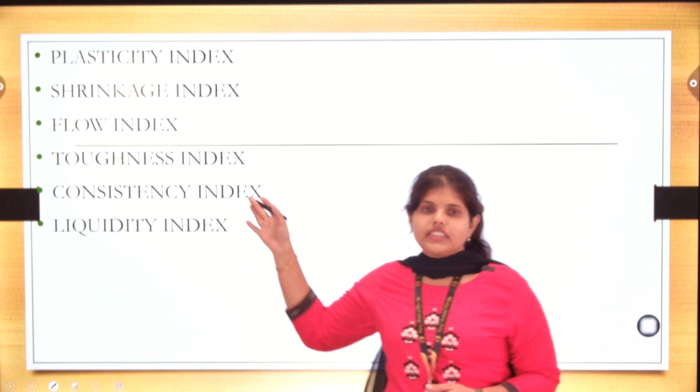Those are plasticity index, shrinkage index, flow index, toughness index, consistency and liquidity index. We will discuss these indices one by one. Let's come to what is plasticity index.

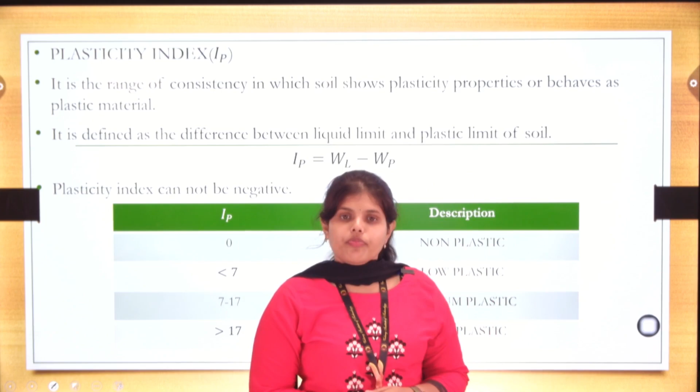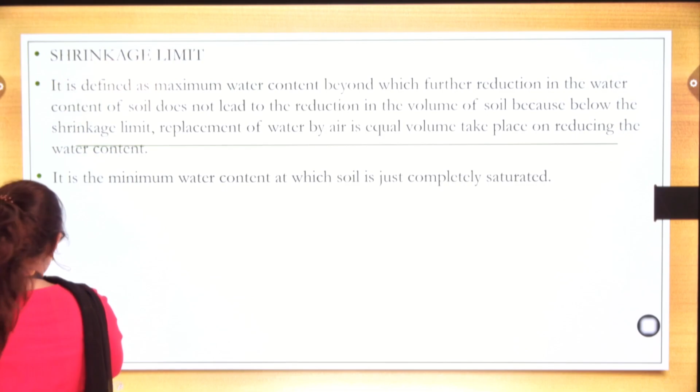Plasticity is nothing but the range of consistency in which soil shows plasticity properties or behavior, as shown in that diagram in our previous diagram that we have already seen. Let's first visit that diagram once. We have already discussed these things in our previous classes.

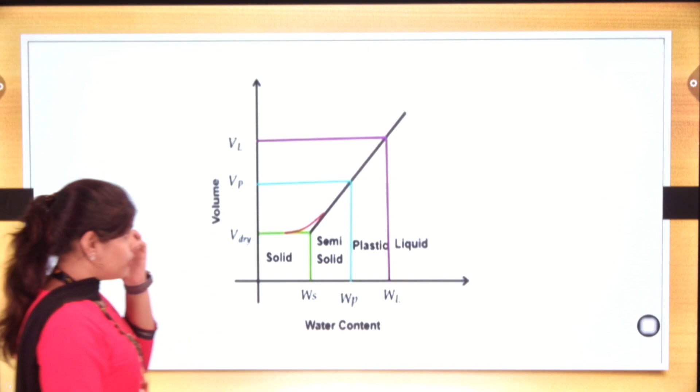So here first go to plasticity index. Plasticity index is nothing but the difference between liquid limit and plastic limit. So we can remember the difference between liquid limit and plastic limit is plasticity index. Likewise, shrinkage index and shrinkage limit, we will discuss that here.

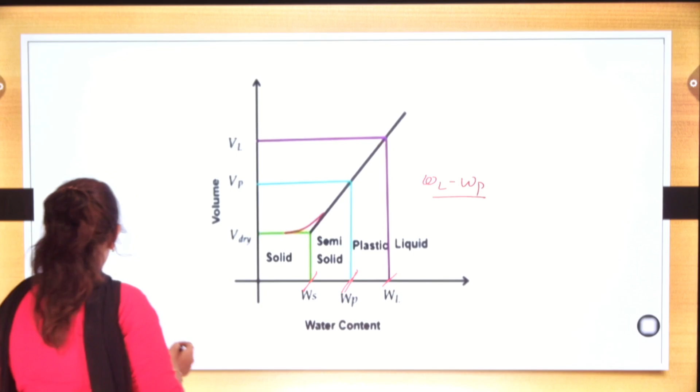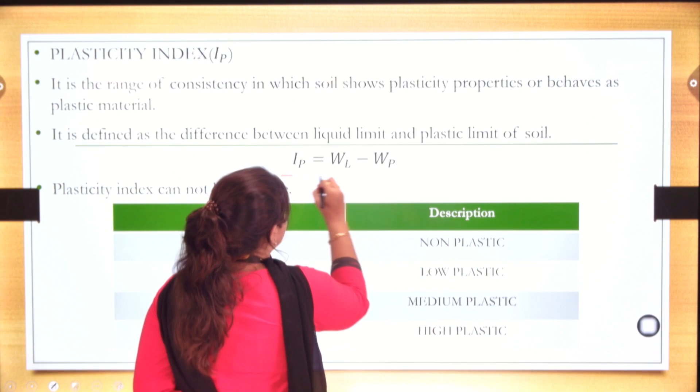So in plasticity index, here, plasticity index is denoted by IP and it is the difference of liquid limit and plastic limit. So plasticity index cannot be negative, right? Why? As the diagram was like that.

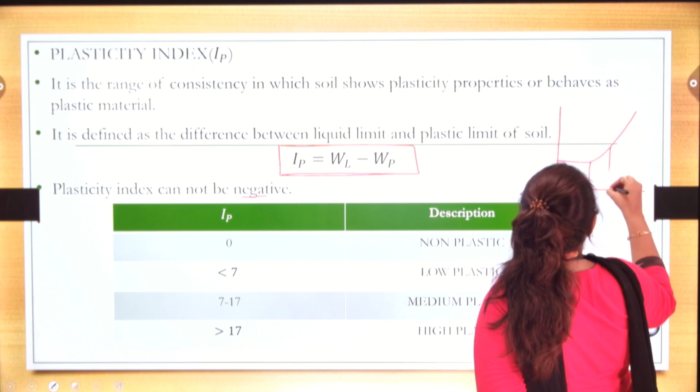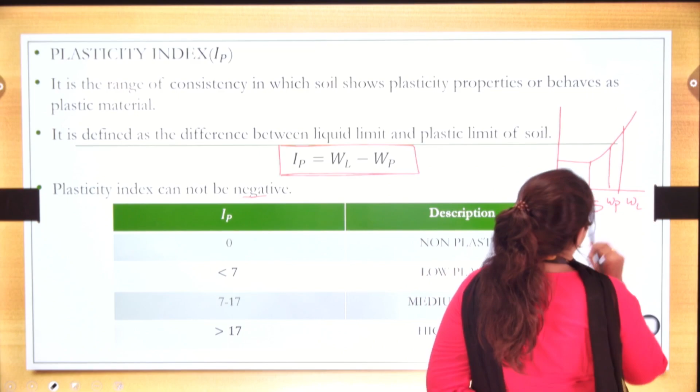So in case of here, we have WL, WP and WS. We have three things: one is our liquid limit, plastic limit and shrinkage limit.

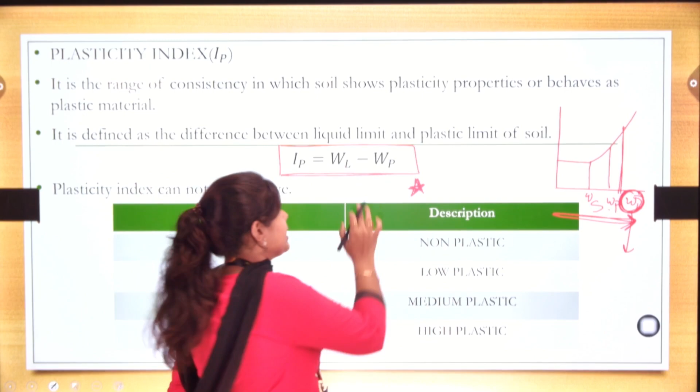As we know, water content is increasing. So while increasing the water content, when the water content is at the upper limit, that will be our liquid limit. So here we can take one point as proof, or highlight that point, that always liquid limit is more than plastic limit.

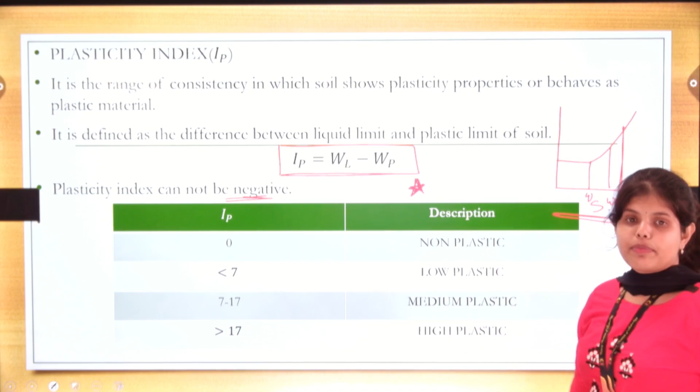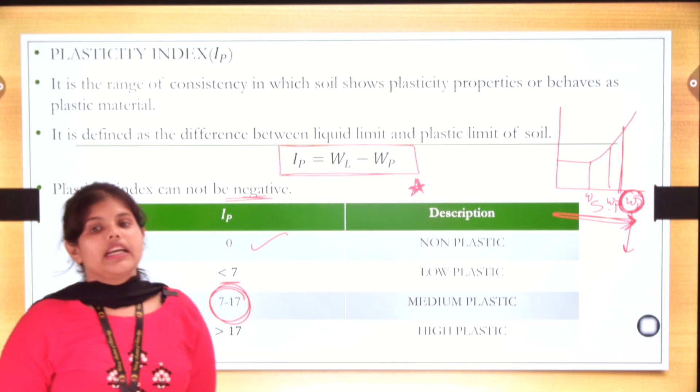So we can say the IP will never be negative, right? So if IP lies at 0, then we can say it is non-plastic in nature. If IP is less than 7, then we term that as low plastic. If the values lie between 7 to 17, then that will be termed as medium plastic, and if more than 17, then that will be termed as high plastic.

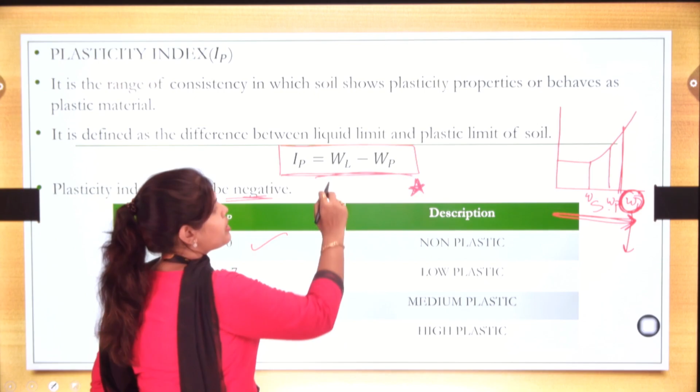So we have understood plasticity index. In plasticity index, there is nothing but it is the difference between liquid limit and plastic limit. So next we come to what is shrinkage index. Shrinkage index is like that also.

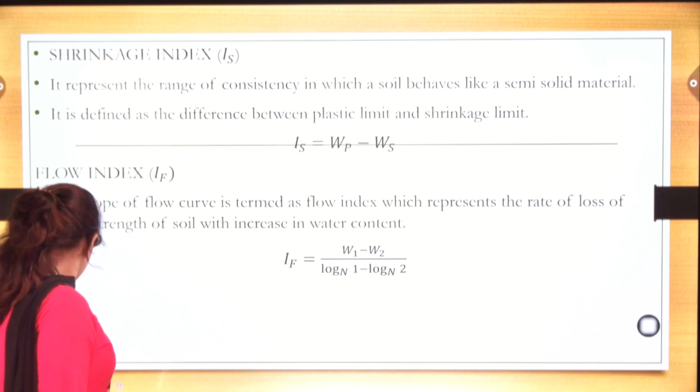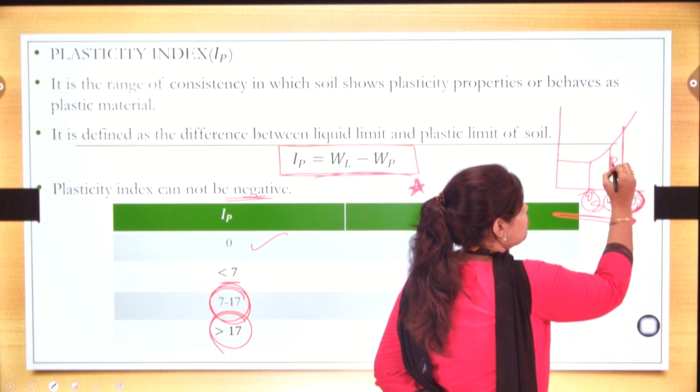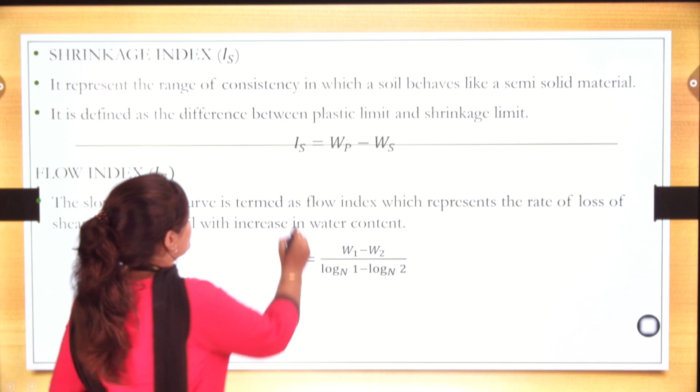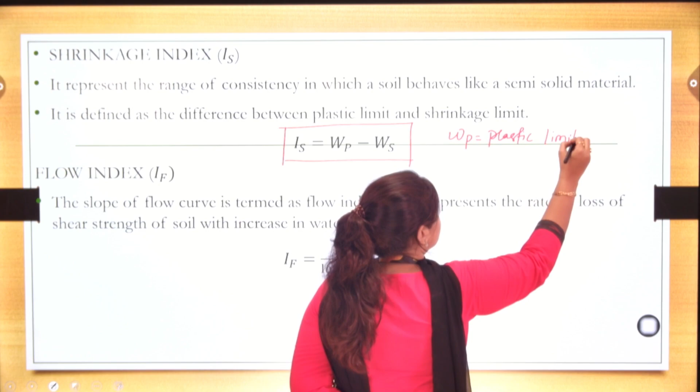In this diagram, first we have WL, WP and WS. So the difference between WL and WP is IP, and the difference between plastic limit and shrinkage limit is nothing but our shrinkage index. We term it as IS equals WP minus WS, where WP is plastic limit and WS is shrinkage limit.

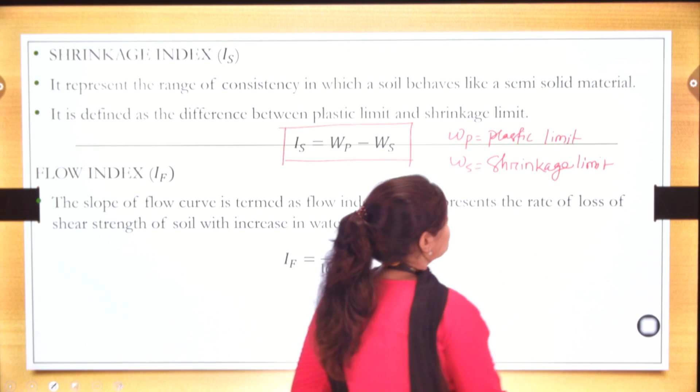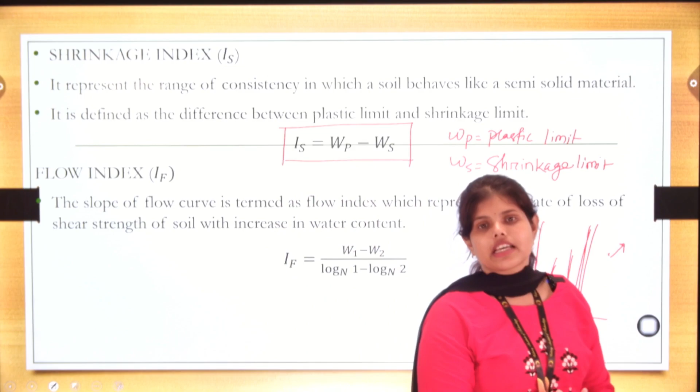So the further definition says that it represents the range of consistency in which soil will behave like a semi-solid material. So first, if water content is higher, soil will behave like liquid or it will start to flow. Then if we lower some water content, the soil will behave like plastic. And if we lower some more amount of moisture content, then soil will behave like semi-solid. So this defines the difference between plastic limit and shrinkage limit, as I have already told. Shrinkage index is denoted by IS, and IS equals WP minus WS.

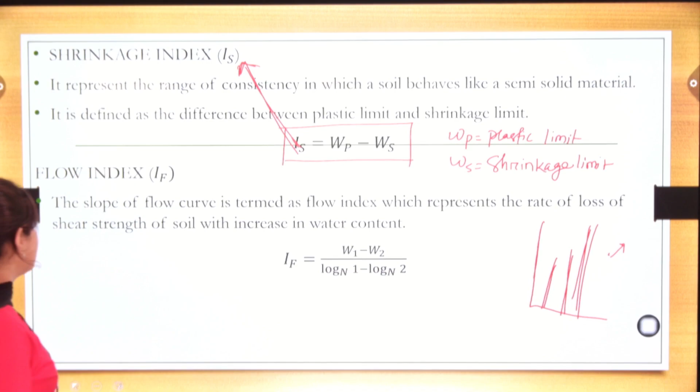Next comes what is flow index. Flow index is the slope of the flow curve, which is termed as flow index.

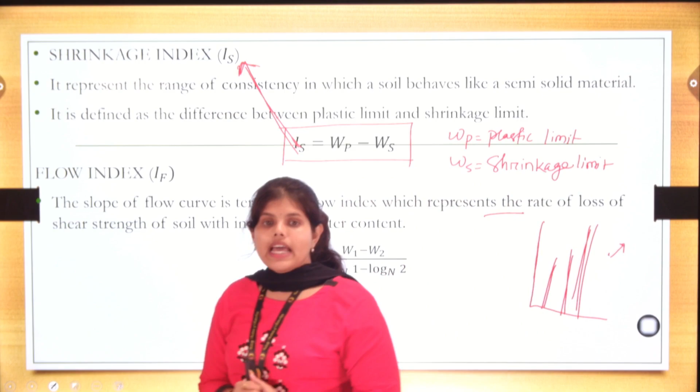Okay, so what does this represent? The rate of loss of shear strength of soil with increase in water content. So the formula for flow index is...

IF is equal to W1 minus W2 over log N1 minus log N2. What are these things? If we draw one flow curve, there will be a number of blows on this axis, and the y-axis shows water content. We will understand later why this curve looks like this and why we take these values. When number of blows increases, there will be a decrease in water content.

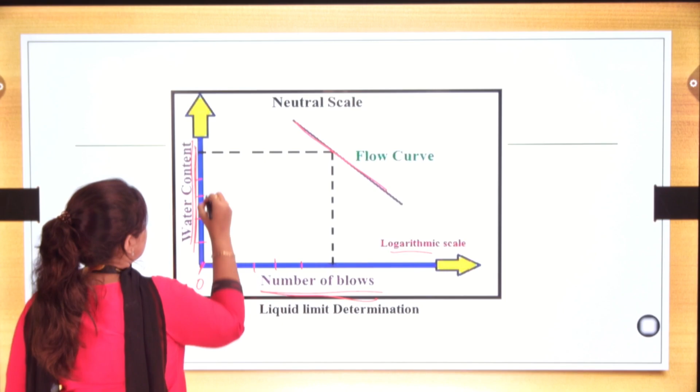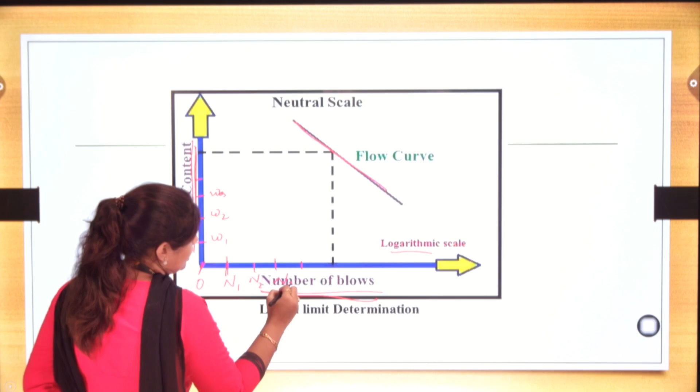We just need to remember the formula, that is IF equals W1 minus W2. What are W1 and W2? Here this is 0, and if we increase water content, we will have W1, W2, W3 like this. And on this scale we will have N1, N2, N3 and so on.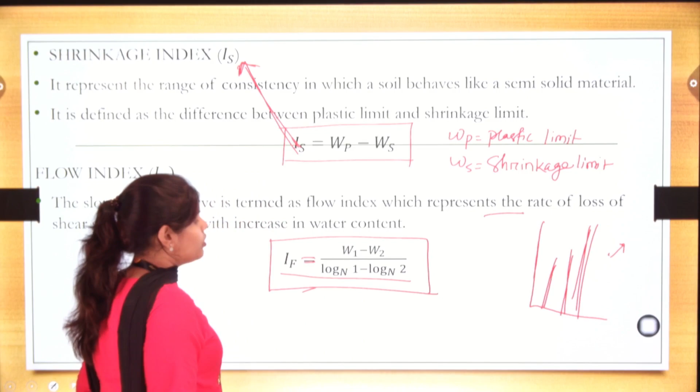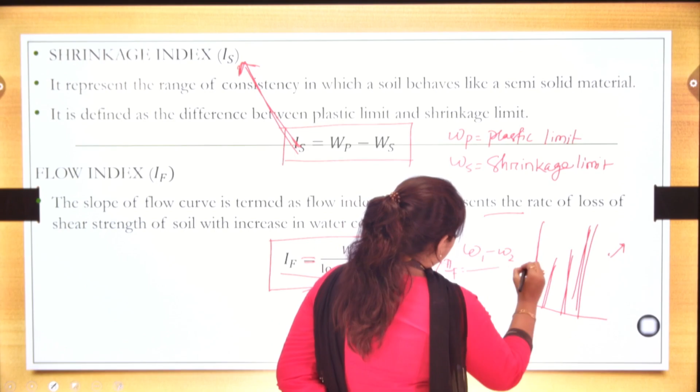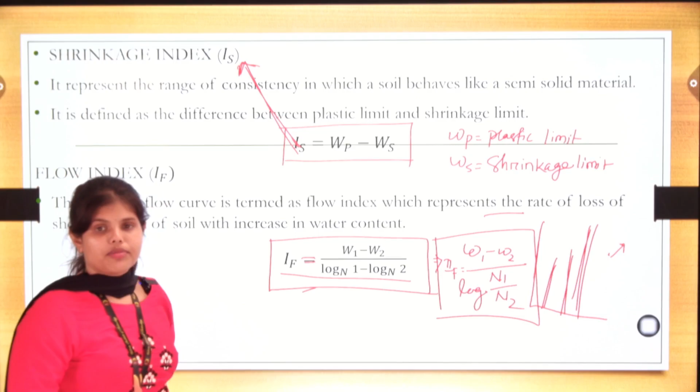So we have the formula, IF equals W1 minus W2 upon log N1 minus log N2. We can also write IF as W1 minus W2 upon log of N1 by N2. So here, for flow index, we have the formula IF equals W1 minus W2 over log N1 by N2.

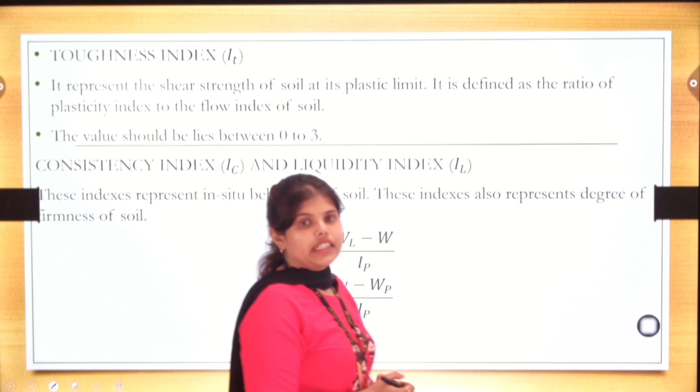Next is toughness index, represented as IT. It represents the shear strength of soil at its plastic limit. It is defined as the ratio of plasticity index to flow index. So IT will be plasticity index upon flow index, that is IP upon IF.

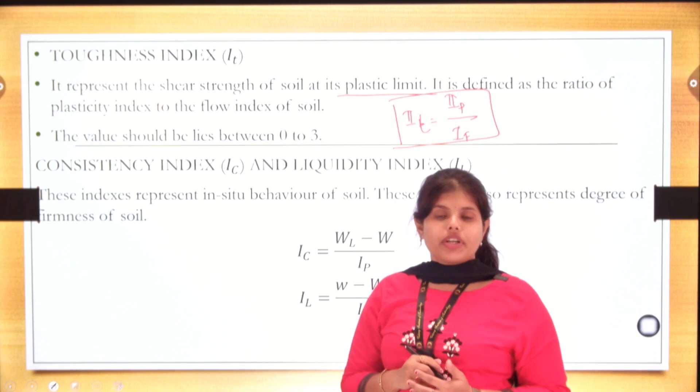IT is your toughness index, IP is your plasticity index, and IF is nothing but the flow index. The value of toughness index, IT, should always lie between 0 and 3.

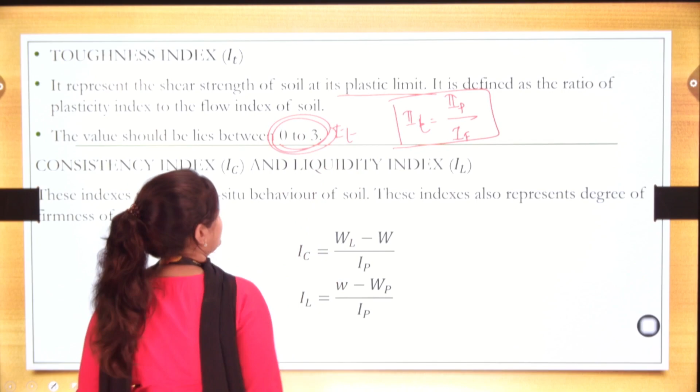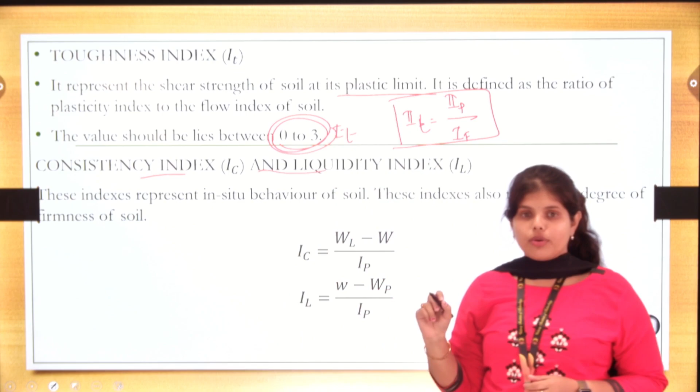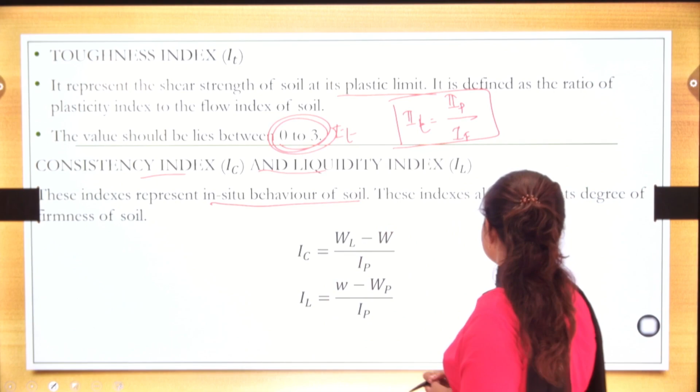Next is our consistency index and liquidity index. These are very similar to each other. What does this index represent? The in situ behavior of soil. In situ means inside, when soil is present and there is no change - that behavior is termed in situ behavior of soil. These indexes represent the degree of firmness of soil, meaning how much fine material is present in the soil.

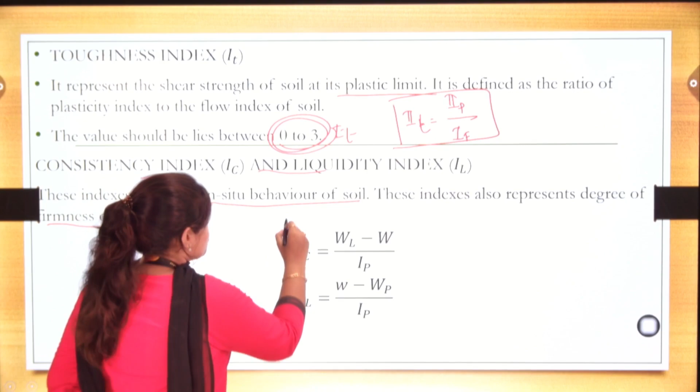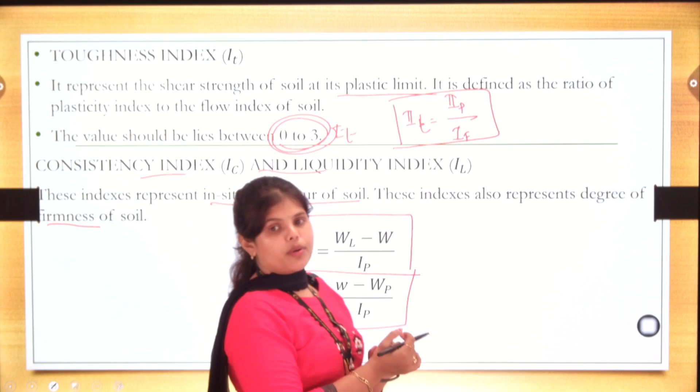So this is the formula of consistency index, and here is the formula of liquidity index. IC is liquid limit minus W by IP, where W is nothing but the natural water content. And IC is nothing but the consistency index.

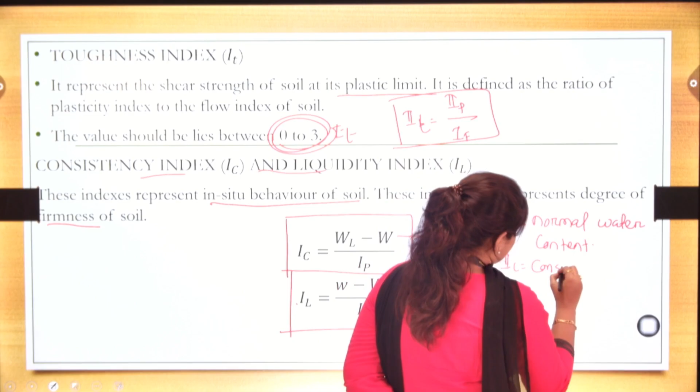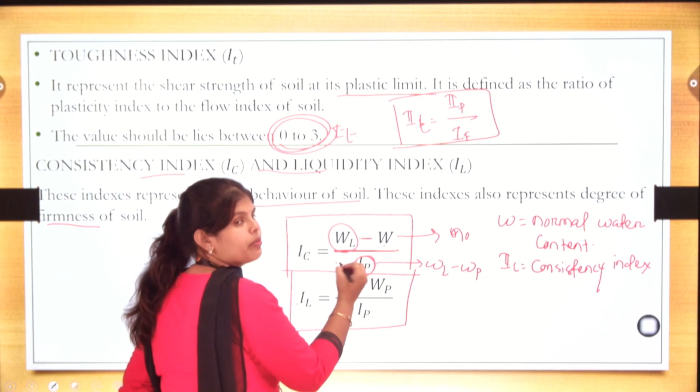And here IP is, as we already said, WL minus WP. So we have the formula: liquid limit minus natural water content upon liquid limit minus plastic limit, that is consistency index. And liquidity index is natural water content minus WP upon IP, that is WL minus WP. Here we have the formulas for consistency index and liquidity index.

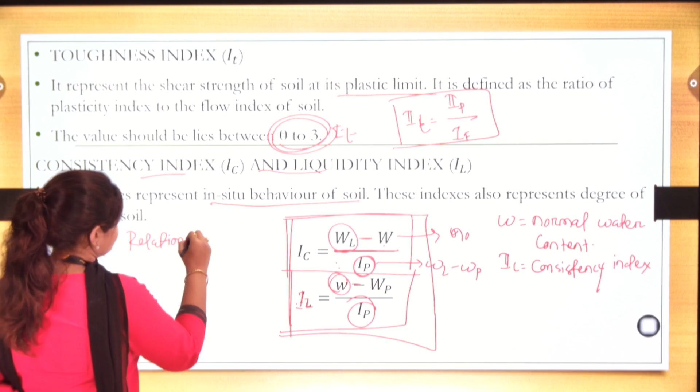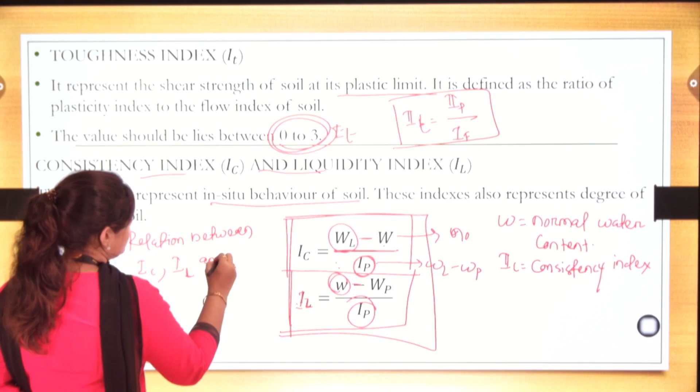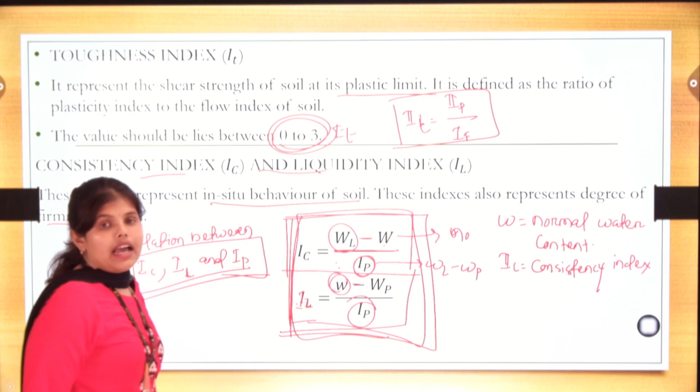So from this we will have a relation between IC, IL and IP. In our next class, if we have the values of liquid limit and plastic limit, we will put those in and solve some numericals to find out the consistency index, liquidity index and plasticity index. So in our next class we will solve a lot of numericals based on this.